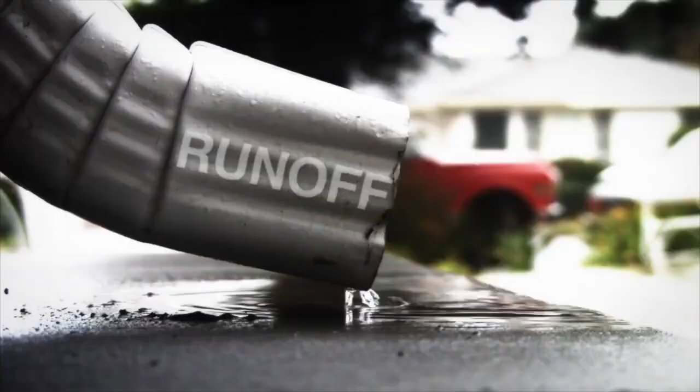In North America, pollution of nutrients from farms to nearby water sources always poses a challenge to the sustainability of the environment. To be more specific, nutrients such as magnesium, phosphate, and ammonium are washed away from the soils by heavy rainfalls or an unusual amount of irrigation water provided in the farmlands, which causes algae bloom or a like negative impact.

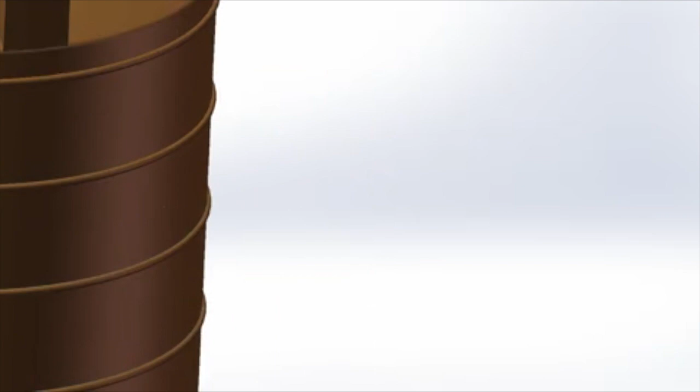Therefore, the irrigation water filtration and recovery system was implemented to prevent the redundant nutrients from leaking into water sources such as Barton County Lake to the most extent. This serves farmers and the local community a healthier and sustainable environment, which prevents intoxication from algae bloom from influencing the water source in North America.

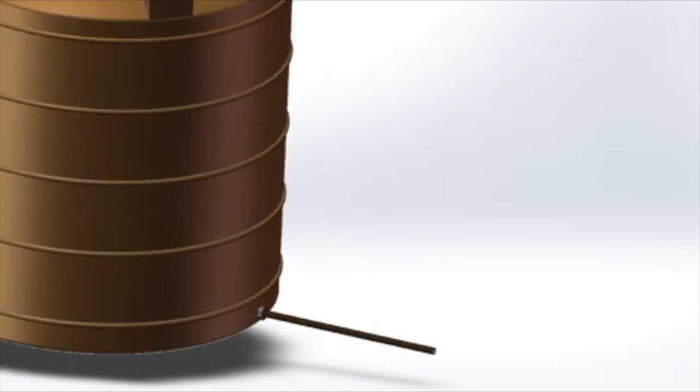Irrigation water filtration and recovery system is composed of both physical filtration and chemical precipitation, which can filter out pollutants including magnesium, phosphate, and ammonium. First of all, water flows into the drains and is connected to a water storage tank through the water pipes. And then water flows to the second tank through a one-way valve for chemical reaction.

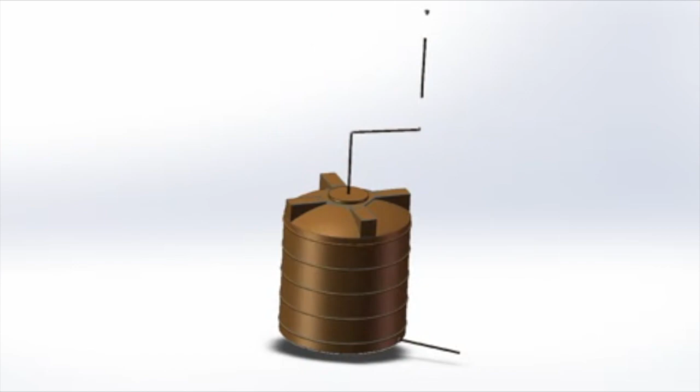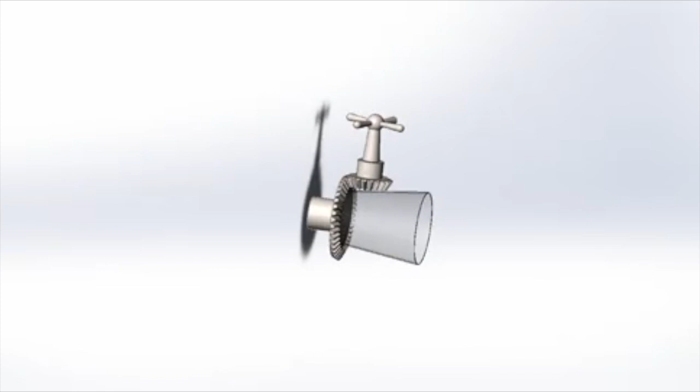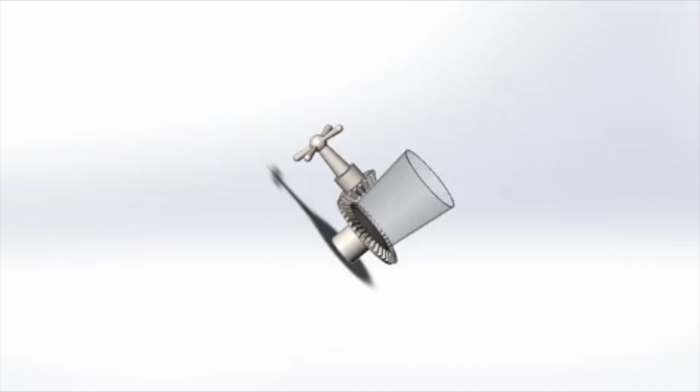The MAP crystallization occurs spontaneously when the pH is between 8.5 to 9.3 with excess pollutants. Therefore, sodium hydroxide is needed to alkalize the wastewater, and a pH sensor is installed to monitor the pH. Once the condition is reached, the crystal starts to form as soon as 1 minute and reaches equilibrium at around 180 minutes. After the precipitation, the pH sensor will check the pH and add in hydrochloric acid until the pH becomes 7.

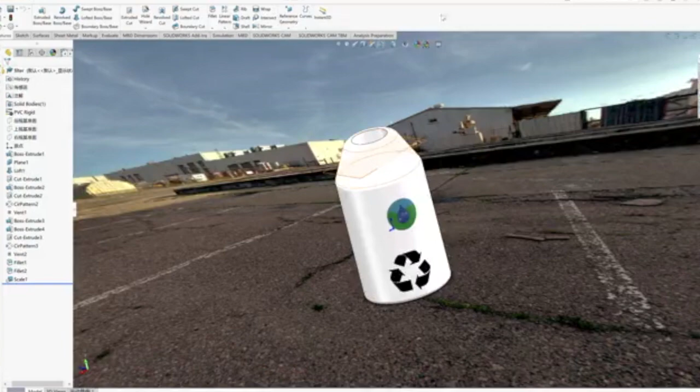After the chemical filtration, at most 95% of the phosphate is removed. After the chemical precipitation, the biochar filter does further filtration physically. The wastewater flows through a few layers of sand and rock to filter out some big waste, and the rest of the wastewater flows to the biochar filter, which works through the process of adsorption. Phosphate molecules are clumped to the biochar. After the second filtration, 99.95% of phosphate is filtered and the water is released to the lake or river nearby.

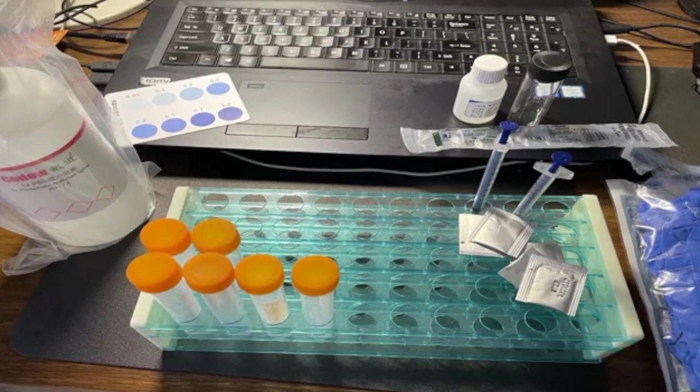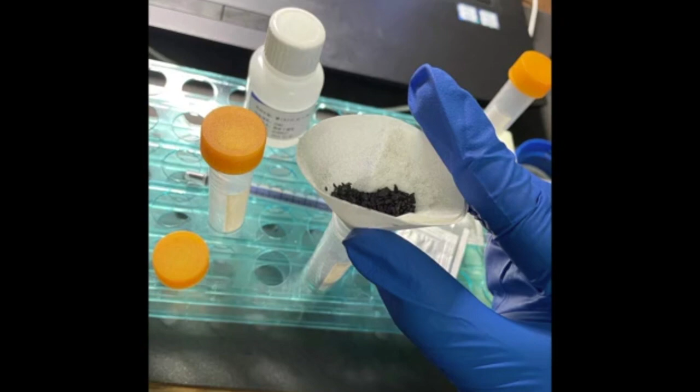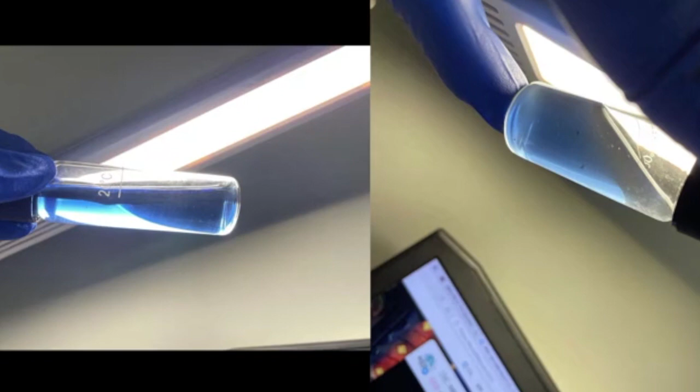To prove the efficiency of our active carbon filter, we bought phosphate buffer solution online and compared concentration before and after the filtration. Fill both test tubes with 15 ml 0.1 mol of phosphate buffer solution, but the second test tube contained 12 ml of active carbon. Then we use a filter paper to separate most of the carbon powder in the solution. The image on the right shows that our filter is effective against phosphate.

Our project provides a possible solution for solving such water problems. However, there are still some difficulties for us to consider, and if there is some additional support, it will be helpful for developing our project. One of the barriers is the slightly alkaline solution, because we need to add sodium hydroxide into the original wastewater, so after processing, the solution will have a high pH value. In order to solve this, we can add hydrogen chloride into the processed water. However, we still need some comprehensive evaluation to see whether such emission will cause pernicious environmental problems.